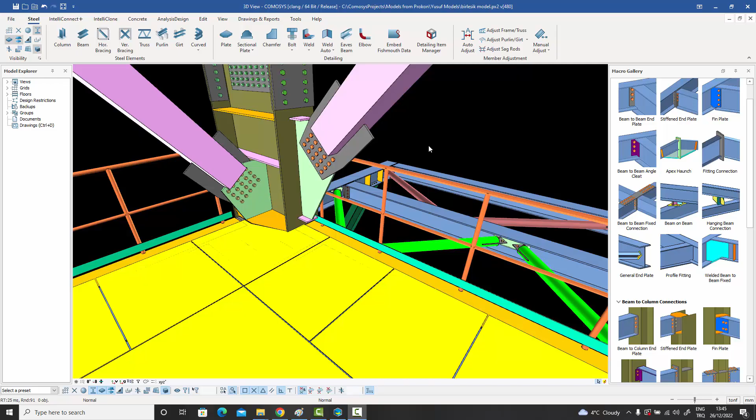Lots has happened during the last 6 months. COMOSYS has received a great response from the structural engineering and detailing community. People are beginning to see how they can increase their productivity way beyond the levels they had before. It's a cutthroat world out there, and every bit of juice we can extract out of our software is welcome. A man hour saved is a man hour earned, and when you're saving thousands of man hours, the bottom line can flip to green so easily.

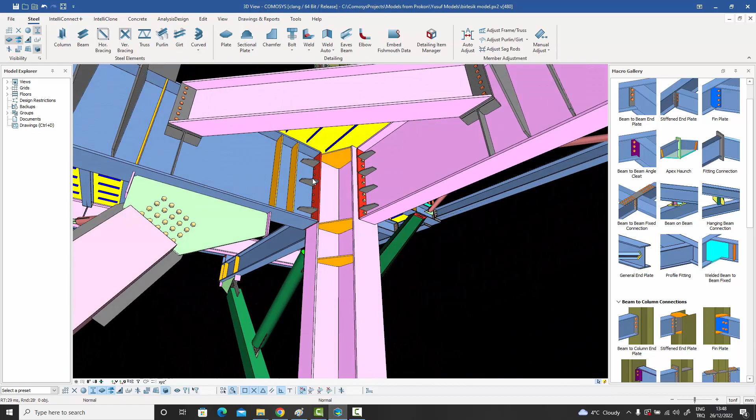Now, the next thing I want to talk about is the IFC Import feature, which we have implemented in this version of COMOSYS. IFC is fast becoming the standard mode of interoperability between programs. All the major software used in the construction industry are trying to have IFC import and export capabilities inside their software.

As you would already know, we already had the IFC export feature inside COMOSYS. So if you go to the file menu, there is import/export over here, and if you go to the export one, we already have the IFC export feature. But as of this release, we now also have the IFC import feature implemented in COMOSYS.

Before I begin talking about the details of the IFC import feature, let me start by saying that the IFC standard is a very generic format, and unfortunately many programs implement it differently. So there's not a standard way of implementation. Some implement it more intelligently than others, so in some cases you're able to extract the profile information and the material information, giving you the ability to convert these objects into native objects. But in some programs, the implementation is such that you're not able to convert it into your own native profiles. I'll talk about these things as we go along, but I just wanted to say that upfront.

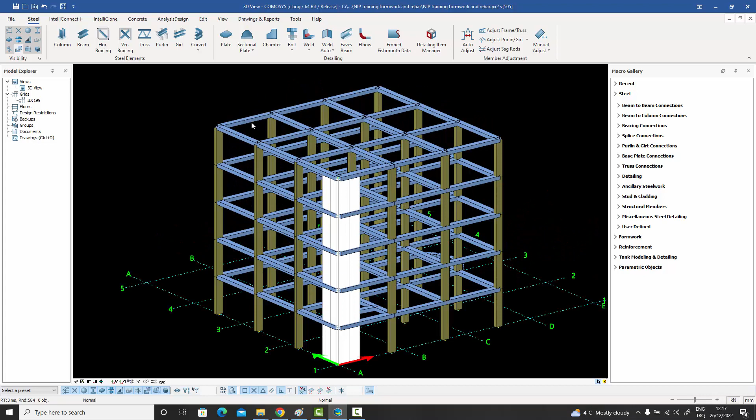If you notice, it has converted them into native objects - the beams and columns have been converted into native objects. Now let's do another example.

Let's go to the IFC import once again, and this time choose another file - the other one, TR91110. Let's say open, select that, say open, and then import. Once again, it brings up the material map.

There's one material this time, and it's undefined in the original IFC file, so I can bring it in as ST52 material when importing. Similarly, if I go to the profile map, it hasn't found any profile in this whole thing, so I can just say confirm, and it will bring in a solid.

These are all solids. None of these have been entered in the original IFC file as profiles. They've all been entered as solids. So that is the reason it doesn't know what to do with them, and it can't convert them into a native object, but it can show them to you on the screen.

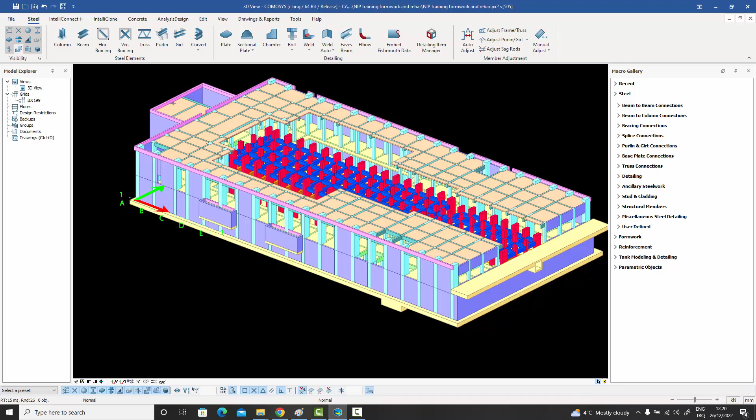So this is a very handy feature. What it allows you to do is even if the profiles are not convertible into local native profiles, it will still bring them on the screen, and you will be able to then work around them in your own.

This time around, let's choose another IFC file, and let's choose it from a different program. So let's do an ETABS example, for example. This file has been imported from the ETABS program, and let's open it. And once again, press the import button. This time it hasn't found any material definition inside the file, so that's interesting.

If I go to the profile maps, it has found these 3 profiles, and it has also found the corresponding COMOSYS names in the profile database. So we can just confirm that, and immediately the file has been imported as native objects, but their material definition has been set as default because it couldn't really find any material for them.

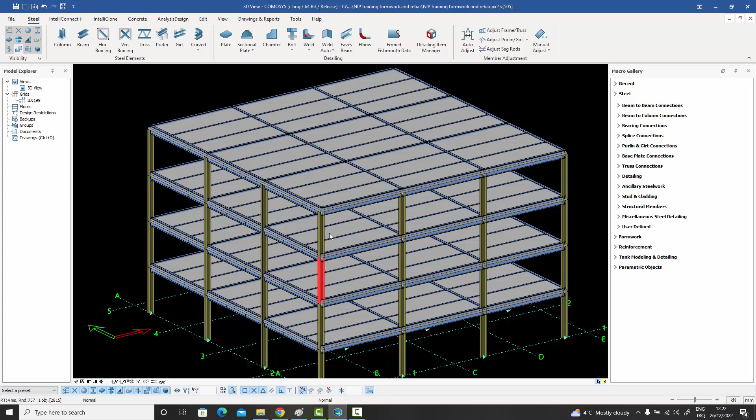So this is once again a very easy and quick way. And like I said, in this case, you can just continue your modeling directly in COMOSYS because you now have the model in the native format of COMOSYS.

Now let's do a Revit example. So let me go and select my IFC import, go to my 3 dots over here, go to the Revit file. This has been exported from Revit. We've got more than one example. Let me just take this one, for example, and import that one. And you can see that it brings you this material map.

So there are so many materials which have been defined in the Revit file, and they don't have the corresponding names in COMOSYS. If you don't select anything, then they'll be imported with standard names. But if you want, you can actually select the corresponding names. And similarly for profiles, there's no profile, it's all generic solids.

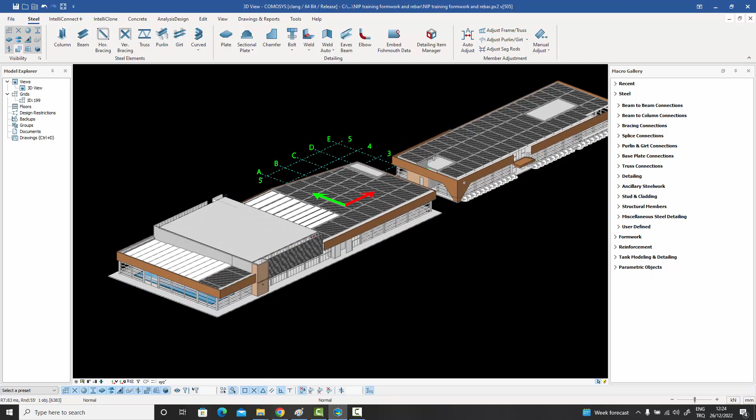So we just say confirm, and immediately we see that the building has been imported into COMOSYS, and you can see all the details. So these are all separate pieces. If you zoom into that, even the architectural leaves and trees have been imported, and you can now work around this model which has been imported from the Revit ecosystem.

So very convenient. It makes the whole process very convenient and handy. All you need to do is just go and select your IFC file, do the mapping, and you will get your model.

Finally, let's take you through the Tekla example. Let me press on these dots once again. There's a Tekla model over here. We can just double click on that and press import, and it will bring in the mapping of the materials found in the Tekla model and the equivalent materials found in COMOSYS.

And like I said, you can add those. There's also a profile map, and you can add them. If you don't select something, a standard default profile will be used. So let me just accept these settings right now. Press confirm, and you see that the model is being started.

COMOSYS has started the import of the model. This is a fairly large, complicated model, so it's going to take some time. The import will take a certain amount of time, but it will finish the job.

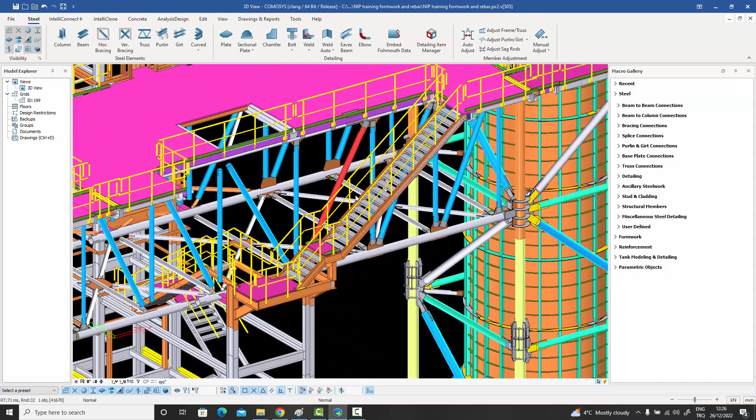And there, as you see on the screen, it has finished importing the entire structure from Tekla. It's a pretty complicated structure. It has all the plates and the profiles and the generic solids, and they have been imported as intelligent objects, or as solids, depending on whether it has found a corresponding native element in COMOSYS or not. So this is an example of an IFC import from an IFC file taken from Tekla.

I want to do one more example of actual equipment. You will require in certain cases to import equipment, for example, in the form of IFC files. So I have an example over here. It's this one, it's imported from an AutoCAD file. Let me just press that and press the import button.

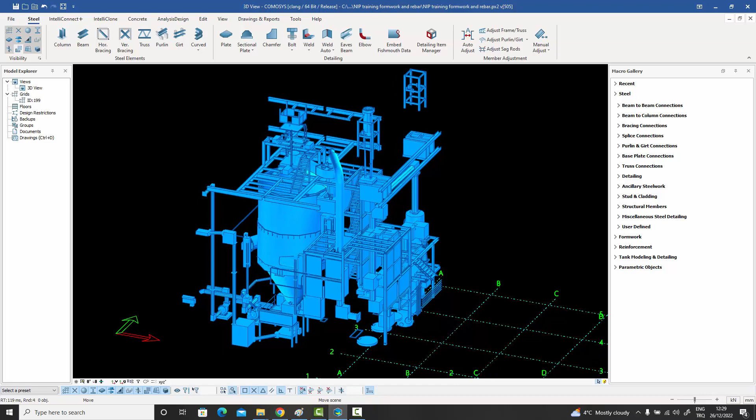It starts reading the file, and it gives us a map. Once again, as always, it takes us to this material map and the profile map. I can just say confirm. And once it's done, you can see the results on the screen. It has brought this equipment file into COMOSYS, and now you can work your way around it and create your model around it.

As I talked about, some of these objects are very complicated, and the level of detail has also been implemented. So, for example, if I were to look at this object, it's basically looking like a box.

But when I zoom in, at a certain point you start seeing the details, and if you see, it's a very detailed object with all sorts of detail inside it. And what it has done is it has allowed you to basically look at it in that way. If I zoom into that, you see the level of detail is changing. So this is a very handy and convenient way of importing equipment through the IFC format into your COMOSYS model.

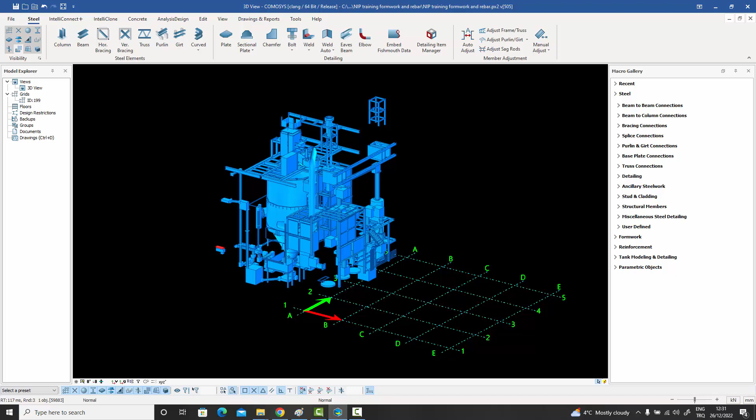Our clients really wanted the IFC import feature because they were working with other programs and they wanted to continue in COMOSYS after having done their basic work in the other software, and they wanted to continue the detailing inside COMOSYS. So with this feature now, which we have implemented in this new version of COMOSYS, we hope that you will really enjoy working with COMOSYS even more.

Another interoperability feature which I want to talk about is the new export to SAP2000 feature which we have added to COMOSYS in this version. Many of our clients are already using the SAP2000 software for analysis and design of structures. And sometimes they get models from other places, or they want to import into COMOSYS or export from COMOSYS. And the real need which they feel is they want to confirm the analysis results of COMOSYS because they're familiar with the SAP2000 interface. So there were a lot of requests in this regard.

So what we did was, if you go to the file menu and go to the import export menu, under the export menu, we previously had only the SAP2000 version 7 export, which was pretty outdated. But now we've added SAP2000 version 24. And all you need to do is just click on that, and you can select any place. You can just give it any file name which you want. And once you do that, the file will be exported to the location.

And what it does is it creates two files. One is the S2K file, but more than that, it also exports a PRO file, which is the profile section database. And the advantage this gives you is that basically the entire database as it appears in COMOSYS is exported to the SAP library as well. And what that results in is that you can actually compare the analysis results, and they will be exact to whatever fifth decimal place if you want.

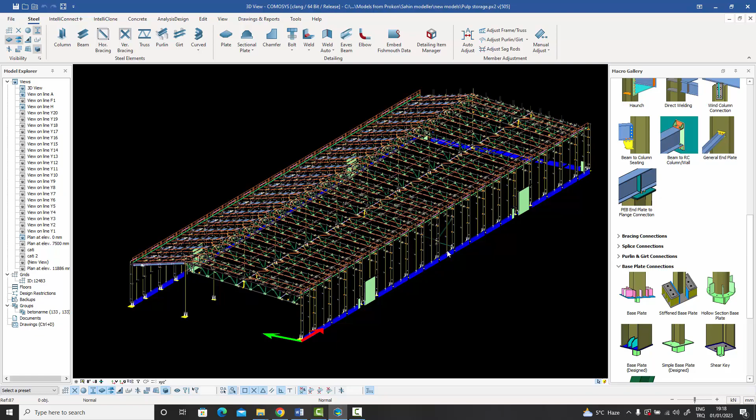Because normally the section properties in two different programs can be slightly different. The moments of inertia, for example, the radii of gyration, the cross-sectional areas, those kinds of things. And if there are minor variations, then that leads to minor differences in the analysis results as well. Because we knew that the reason why our clients were requesting this feature was because they wanted to compare the results.

So we basically exported the exact section parameters which were on the COMOSYS side, and now by a simple click, the user can just go to the SAP2000 side and import the S2K file along with the PRO file. And the only thing they need to do is that inside the S2K file, there is a reference to the PRO file, which is the section parameters, and there's a local path. This local path is dependent on your machine. So if you're giving it to someone else to use, then you need to change the path of the PRO file given in the S2K.

This is a simple find and replace command. You just look for all the instances where the PRO file has been mentioned, and then quickly find and replace with the new path, and you will be able to use it.

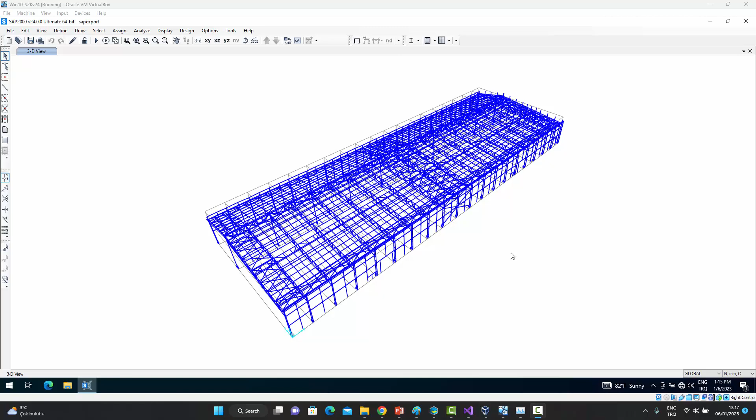Now, once you export your S2K file and your PRO, which is the section properties file, and you go into your SAP2000 application, you will see that the entire model, along with the loads and the load combinations, basically everything you need to just press the run button, has been exported into the application. And this will be a very convenient way for you to compare the analysis results and the design results if need be, and see how accurate COMOSYS' analysis engine is.

Now let's talk about some analysis and design features which we have incorporated in the new version of COMOSYS. Let me begin with seismic design options. So normally seismic design is carried out either through the equivalent static method or through a proper dynamic analysis, which requires modal analysis or time history analysis. But a lot of times the user is required to do an equivalent static analysis for multi-story buildings.

Now, in the new version of COMOSYS, if I go to the analysis and design, go to my load case, and go to create, edit load case and combinations, you must have seen this dialog box before. We've got the load case tab, the load combo, response spectrum, etc. But if I go to the load case one, I can actually create a new load case.

I can call it earthquake in the X direction, for example, and I can give it the type: it's an earthquake load. And of course other parameters might need to be entered. But what I want to show right now is this auto equivalent static load option, which you can use. We've got some options available right now, and we'll keep adding new design standards to it.

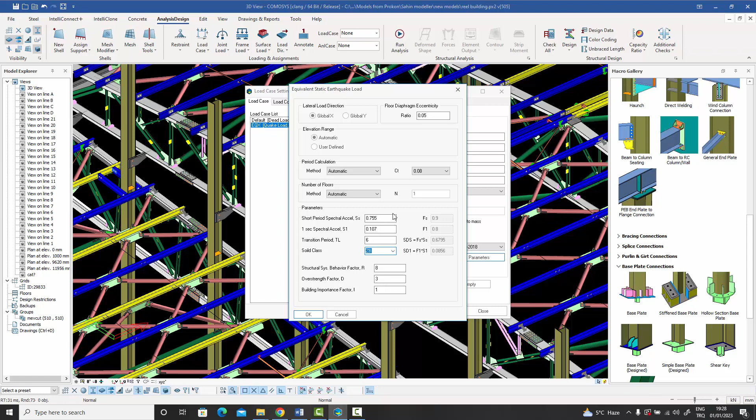So we will be adding several more of these in the coming versions. But it's going to be very easy. Once you have this set up, you just say okay, and then this load case will automatically generate its own equivalent static loads in whatever direction you've asked it to.

Now let's move on to a very important capability which we have added to the COMOSYS version of 2023, and that has to do with the supported design standards. As our existing users will know, if you go to the design settings, we had the options of the American ASD, the American LRFD, the Eurocode 3, the TS 648, and some new Turkish codes. But now we have added IS 800, which is the Indian steel code.

So you will be entering your building the way you normally do. You'll be entering your loads and your load combinations and whatever needs to be done, and then you will run the model. Once you run the model, you can select all of the elements, or you can do a one-click design. As you know, you can select all of them and check what their existing states are.

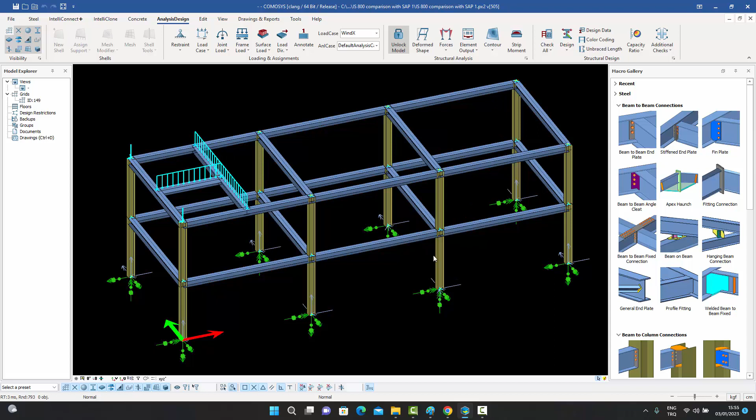So let me select this element over here and go to the check selected option. Like I said, you can select all of them, or without selecting any, just say check all. But let me just check the selected one. And when I do that, immediately it does the design check of that beam according to the Indian standard.

Now, I want to see what the results are. Over here it says design data. If I press that, it will open up this tab, which will show the summarized design data of the beam we have selected. It gives the name of the profile and the classification of the section.

Over here we have all the critical loads and which combo they occurred in. It will tell you that the location is 600 centimeters. This is the axial load. This is the M22. This is the M33. The shear loads in the second direction, the third direction, and the torsion value.

Similarly, the section properties are given over here. The other geometric properties of the section are given over here. This is where the meat of the Indian code is. So you will see the TD value, which is related to the Indian standards. This will all, of course, be given in these units, which you have at the bottom right of the screen.

The PD value, the MDY, MDZ, MNDY, all the engineers who are designing according to the Indian standards will know what I'm talking about. MNDZ, KSI, KSI LT, the alpha 1, the alpha 2 values, these are all related to the buckling coefficients. PDY, PDZ, all these values are then used into the basic axial, bending 2-2 and bending 3-3 components of the total design stress.

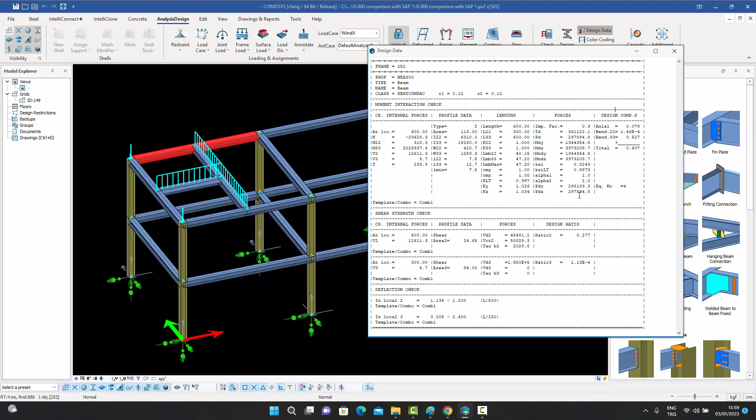Now let's talk about some macro related features which we've added to COMOSYS in this version. So the first thing I want to talk about is that we had a lot of requests from our clients that they wanted an extra option in the angle cleat macros. So if you remember, the angle cleat macros would connect a beam to a beam with an angle cleat, or a beam to a column with an angle cleat, and the cleat would be welded to the secondary and bolted to the primary. Now our clients requested that we have an extra option of having bolts on both sides.

So we have added that option in this version. So now we have the bolted to secondary side or welded to secondary side option. And if we choose the bolted one, then we can create bolts on both sides of the connection.

The next thing which I want to talk about is the flange extension with cut macro. This is quite often used in the offshore industry. And what is needed is that you want to widen the flange at a certain point along the beam or whatever element it is, because something is sitting on that. So for that, we have added this flange extension, and it's very simple to use.

All you do is you select the beam, and then you select a point on the beam, and you can do that very easily with the direct entry method, as you know. So you can say DY2000, and that will give you a point on the beam wherever you want, basically. And then you can put another one ahead of it.

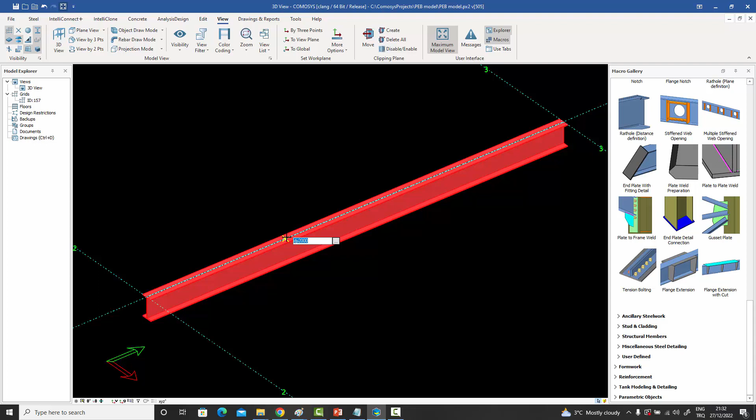And when you do that, it will create a flange extension at that point by cutting out the flange of the beam, and replacing it with a plate, one of the available thickness plates, and it will basically create this widened flange between those 2 points. And what you can do is go inside and change this distance 2000 to whatever number you actually want.

For example, I can make it shorter, I can make it longer, I can make it left aligned or right aligned. As you can see over here, I can make it left aligned like that. I can put it in the middle of the two selected points, or I can make it right aligned with the other one.

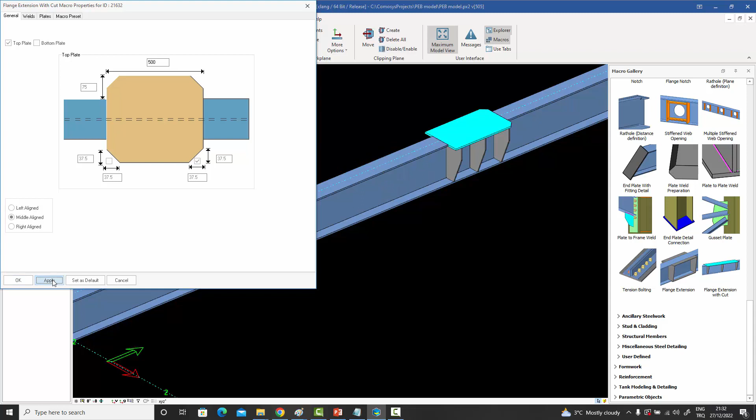Let's make it middle for the moment. And what you can do further beyond this is you can have total control over the plates, the stiffeners below. You can create as many as you want, and you can increase the width over there and all that. All these parameters are available over here. You can set your macro presets as always.

And this is a very convenient way to widen the flange. We had a similar macro before as well, which is the normal flange extension. But this one actually creates two side plates. It doesn't really cut the flange, it adds two extra plates. This new one actually cuts the flange and inserts a plate at those points and gives you a widened flange.

Now let's talk about the welded beam to beam fixed connection. This is very convenient when you have a beam to beam fixed connection. Normally with floor beams we have simple connections, but occasionally with cantilevers or things like that, we have fixed connections. And there are different ways to do that.

We can either have a bolted one, but then typically the problem is that the size of the main and the size of the secondary is not the same. So the bottom flange creates a problem, and the bottom flange pushes in or out and actually hurts the web of the main member. What is needed is something which can sort of convert the incoming secondary beam into a larger size just when it is about to hit the main beam.

And for that, we have developed the welded beam to beam fixed connection. This is also used in the offshore industry a lot. So all you do is you basically select the main beam and you select the secondary beam, and immediately you have this connection in which plates are used.

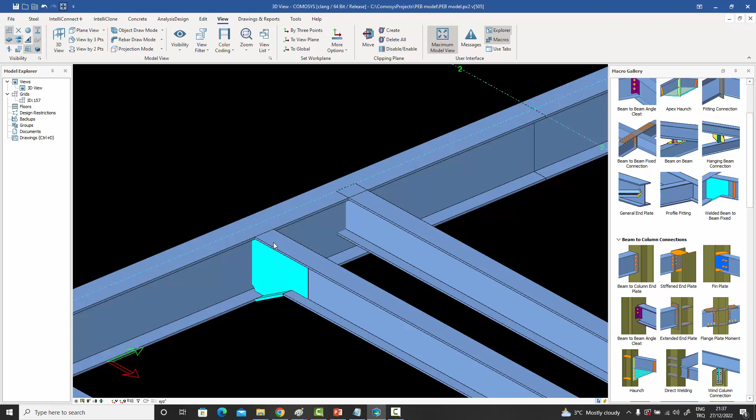The web of the secondary is cut out. So if I were to just show this one only, for example, you can see that the web has been cut out. And if I were to show all, again, a plate has been inserted in the location of the web in this way, and the flange has been extended, it has been continued in such a way that it hits the bottom flange of the main.

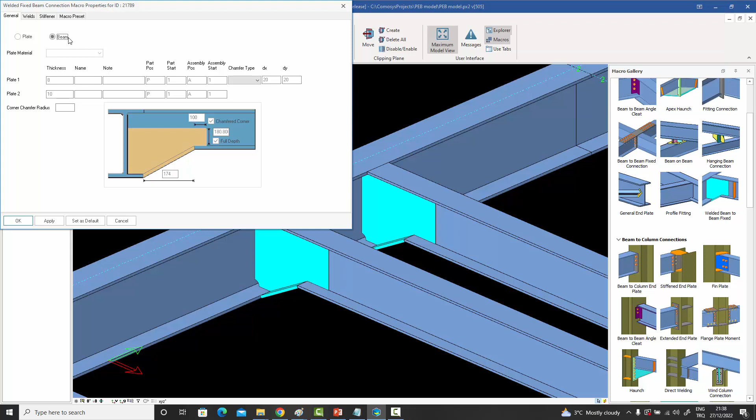Now, there is another option inside this macro. So let me connect another one over here. There's this option if you go inside the macro, in which you can ask it to use either plates or the same profile itself if possible. This one is with a caveat that it's not possible with certain sizes because of the angles involved.

But if you use the beam option, then it will use this very same profile. So this is an IPE 200. It will use a cutout piece of an IPE 200 and create that. It will widen it basically to meet the bottom flange of the main member. Once again, this is a very convenient option. You have your welds over here and over here, and now you have a fixed connection between the two beams, and there is no problem with the bottom flange pressing in.

Another connection which is very popular in the offshore industry is the welded pipe bracing connection, as you can see in the icon as well. It's very common for large pipes, CHS profiles, to be coming in to the beam. And it's also not uncommon that the bracing profiles are actually wider than the beam itself. So the flange of the beam is narrow, so for the connection, the flange needs to be widened.

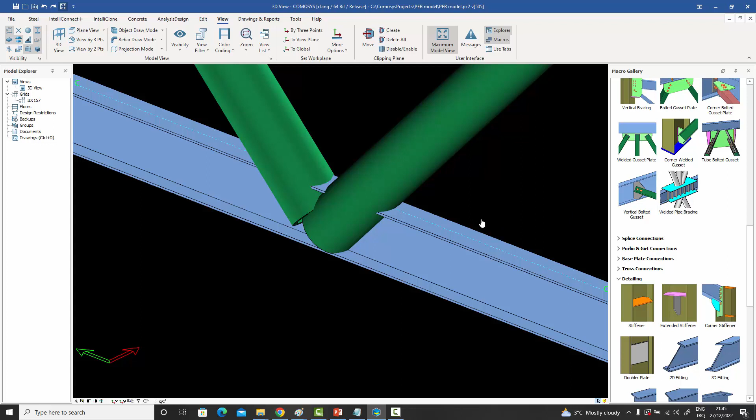And we just talked about the macro which does the widening. But here it's like a combination of this one and the normal connection. All we need is a welded connection between the two. What this particular macro does is, if I were to just select this one, for example, it asks us to select the beam and then the braces. So I can select the two and I can right click.

And when I do that, you can see that it widens the flange according to the need, and it creates a welded connection between the pipes and the plate, which has been basically used as an insert into the flange. The flange has been cut out and a plate has been inserted to widen it, and we have as many stiffeners as we want below.

The interface is complete, and we can basically have as many of those plates as we want, and we can give it whatever width might be needed in the circumstances. But the idea is that you can just directly connect your welded braces to the beam, no matter how wide they are, because it's going to widen the flange anyway.

And that's a very convenient way of creating this connection. This, like I said, is very popular in the offshore industry.

Now let's talk about some pre-engineered building macros which we have developed in this version of COMOSYS. Pre-engineered buildings are very common, used throughout the world, and there are certain connections which are repeatedly used in these types of structures. One of them is the purlin connection, in which the Z profile is used. The connection is basically explained like this: the Z profile is extended on each side, and then they're connected by bolts and a plate. Sometimes we also have struts to connect to the bottom flange of the supporting beam.

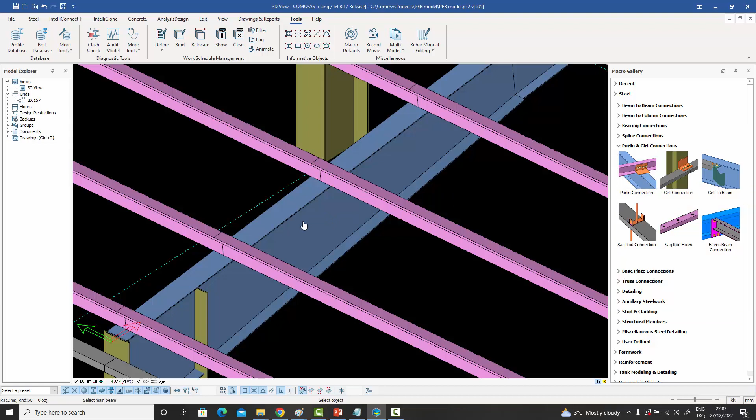Very simply, we can use the normal purlin connection, select the main beam, select the Z profiles, and we get our standard angle connection or whatever the default is. But if we go inside the macro, we have this option of the overlapped Z. If we select that, immediately an overlapped Z connection is created. What that means is that this purlin is extended to the other side, the other one is extended into the first one, and we have a plate connecting the two with 4 bolts. But then there are other bolts as well, which are just connecting the two purlins to each other at these points, according to the need.

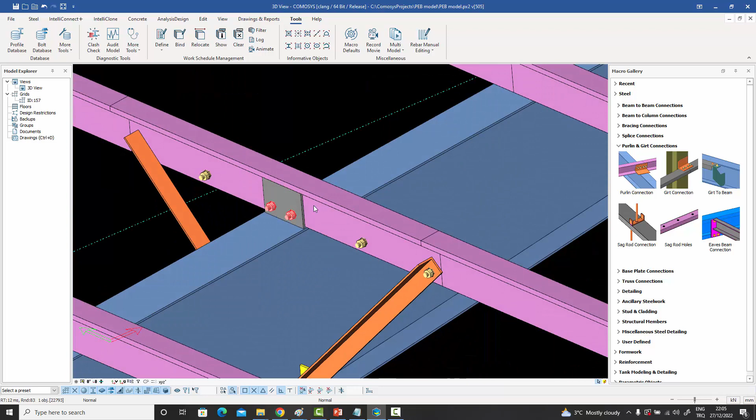What we can do with these now is, if I press the M enter button, I can go to the Z purlin tab, which is new, and I can ask for these struts to be created. These struts will automatically change the IDs of the bolts as well. If I do that, immediately those struts are created on either side of the connection. Now, since the bolt IDs are different, this is a single bolt because it's going through the strut as well, and this is a separate bolt. These two are one ID, and these 4 are one ID because they're going through the plate as well as the other one. So this is a very handy way of creating this new Z-type purlin, overlapped purlin connection, which we have now added to COMOSYS for the creation of pre-engineered buildings.

Now let's talk about another macro used in the pre-engineered buildings sector, and that is the tapered end plate splice. It's very common to have elements which are tapered, one of them tapered, the other straight, or both tapered. You need an end plate splice connection for such situations.

So what we have developed is what you can see on the screen, the tapered splice connection. All you need to do is select the first member and select the second member, and immediately your complicated end plate splice connection, with all the options of creating bolts in different locations and the stiffeners, is created for you. This is very convenient, very easy to use, and it can be used not only for columns but also in similar situations.

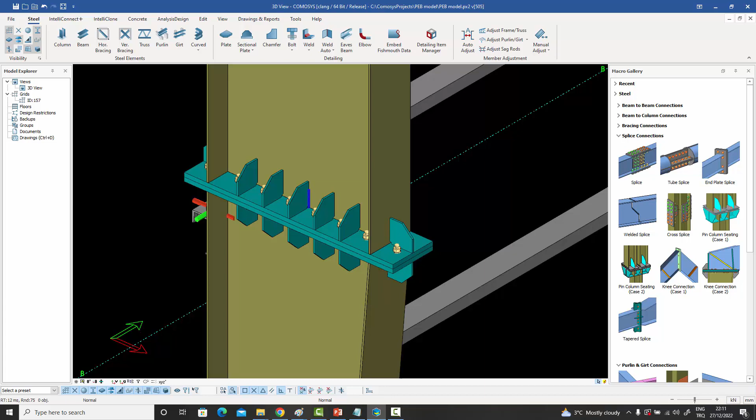Let's continue with more pre-engineered building connections. Another common situation is when wind columns on the facade go and hit the roof beam, where we have connections from the bottom side to the bottom flange of the roof beam. For that, we have developed this PEB end plate to flange connection, which is very simple to use. All you need to do is select the main beam and then select the column, and immediately this connection is created. The bottom flange is cut out, and this plate replaces it since widening is needed at times.

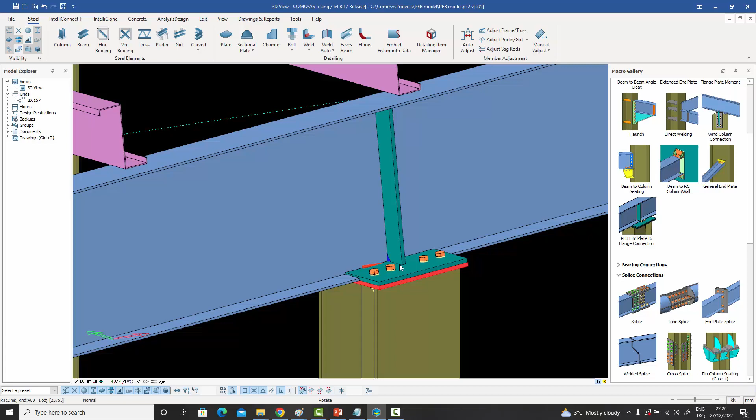Another end plate is given at the end of the column, and you can have complete control over where the bolts are and whether the stiffener will be created or not. But this is a very convenient connection, allowing you to connect the column to the bottom side of the beam when the column is facing in this strong direction.

Now, it is also possible that the strong direction of the column is along this line rather than perpendicular to the beam. This kind of situation is also possible, and the same macro works for that case as well. Once again, just select the beam and the column, and the connection is made with the same style.

You have different styles inside. I didn't open those up to show before, but you can have the option of 2-sided plates, or one plate with the bottom flange cut out, or you can have 2 plates at the sides as well. So, a very convenient way with complete control to create your PEB end plate to flange connection.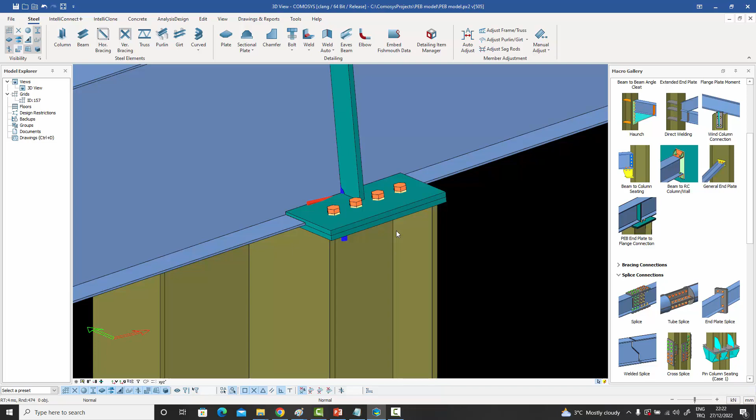Now, moving on with pre-engineered buildings, we come to this very important connection between the column and the beam, perhaps the most important connection of the structure. It is a moment connection, and it is done in different flavors and different styles. Usually we have very large panel zone shear forces in this area as well.

So we've developed the knee connection for this case, and it's very simple to use. All you need to do is select the column and then select the beam, and immediately a very well defined connection is made. Because of this panel zone, a lot of times the thickness of the web is not enough for the incoming beam, so you need a thicker plate over here. This one basically cuts out the web of the tapered member in that area.

If I say show only, you can see that the element has been cut out like that. Let me go back to showing everything. The plate has been put in there in place of the web, and it's a thicker plate than the web. You can obviously change the thicknesses according to your need.

But this one basically creates this connection, puts in the stiffeners. You have complete control over the bolts. You can even have this little extension over there, depending on where your purlins are. So this allows you to create this very complicated connection with a few clicks.

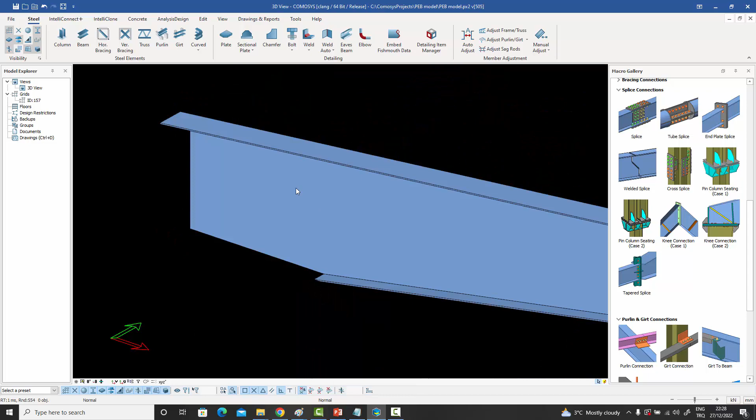In this case we have another option. We can use the column and the beam, instead of cutting the web. So if I just show this only, you can see that the web has not been cut, it continues till the end. But what we have is these extra plates which have been added - these are doubler plates, welded to the web to thicken it in that area. This convenient option allows you to reduce the panel zone stresses, and the stiffeners have been modified according to that.

But that's not all, there is another way of doing the same connection. Once again, let me choose the column and the beam, and this time what we have is the diagonal stiffener. This is another way of reducing the panel zone stresses. You basically put in a diagonal stiffener from end to end, and we have complete control over the geometry.

And the good thing is that instead of 3 different macros, all of them have been collected into this one single macro. Within that macro you have these options of creating the diagonal stiffener or doubler plates, or the removal of the web and insertion of a thicker plate to take care of those high stresses. So this is a very important macro we've added, called the knee connection, for the pre-engineered building sector.

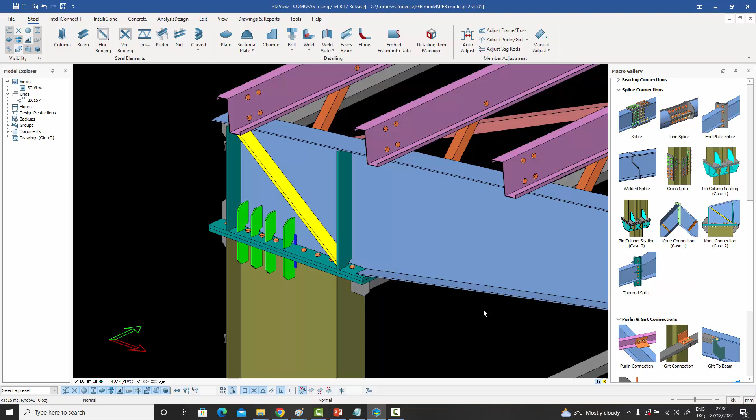And this connection is everywhere, it's rampant. With these new features, we can easily now connect our pre-engineered buildings very, very quickly with the knee connection, with the Z-purlin overlap Z-purlin connection, with the tapered splice connection, and all the things we've talked about. We can easily now very quickly go through our pre-engineered buildings.

Now, after having gone through these major improvements which really make the modeling of pre-engineered buildings very, very easy and fast, let me also talk about some minor changes we've made in existing macros. Previously, the base plate macro only worked with non-tapered sections. But now you can use the same base plate macro with a tapered column, and once again you can create the base plate very, very easily.

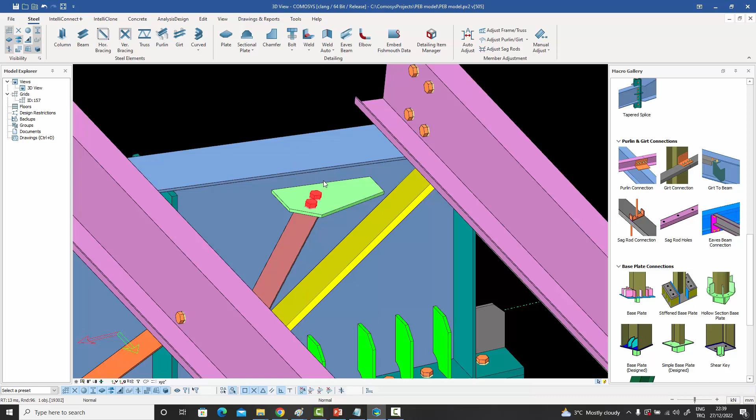Another very important improvement we have done is that now the bolted gusset and the gusset macros in general also work with the tapered profile. Here you see that the bolted gusset macro has been used to connect this roof bracing to the tapered profile. Previously this was not possible, you needed to do some things manually. Now you can easily just use the normal bolted gusset connection with the tapered elements, and your macro is done very quickly for you.

Similarly, your girt macro and the other options for the girt and purlin macros now also work for tapered members, whenever the tapered member is the main member. Previously you could not connect using these macros, but now you can with the new version of Comosys.

So that is a brief summary of the macros we've added in this new version. We've talked about a lot of macros regarding the offshore industry, the pre-engineered building sector, and general improvements. There's a lot we have done in the last 6 months, and the user will be much more satisfied with the new version. We've been listening to our clients, but this was a brief summary of only the macros which have been added to Comosys, and as you can see, these will really help you get your modeling done much, much faster.

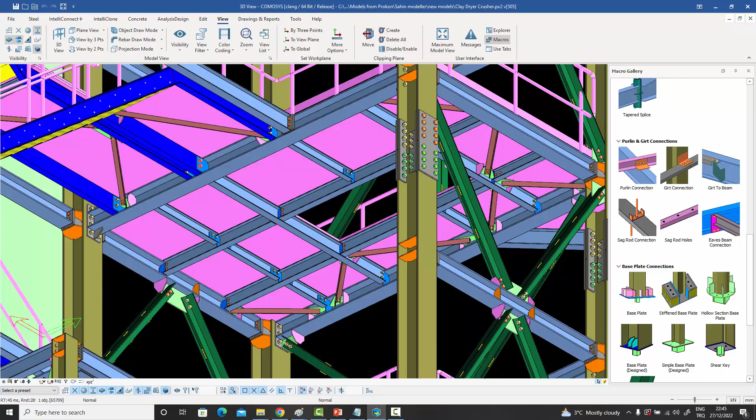The next feature I want to talk about is the implementation of Imperial Units on the drawing side of Comosys. This is a feature which was requested heavily by our clients in the US market, and also those working for the US market, because they heavily use the foot-inch system.

On the drawing side, as you know, we have the dimensions, and the dimensions previously would have the units of millimeters and/or centimeters or one of those. But now we have brought this new option. If I were to double click on any one of these dimensions, you can see that the dimension property editor has changed slightly. First of all, we now have this option of showing the unit as well. So if I press this one and say apply, you can see in which units for that particular dimension we have the units which we have turned on.

That's one extra feature the user can use now - they can have multiple dimensions in the same drawing, and some of them can be millimeters and some can be centimeters or some other unit, and they can specify there, directly on the dimension itself, what the unit is.

But what I'm talking about right now is the Imperial Units, and for this we have made modifications to these three inputs - some new, some modified. There's this unit option appearing now. When you open that, there's the option of millimeters, centimeters, meters, centimeter per meter - that's a new option. There's a foot-inch option now, which is the one we're going to talk about. There's an inch option, once again related to Imperial Units, and also a feet option. So these three are what we will be talking about.

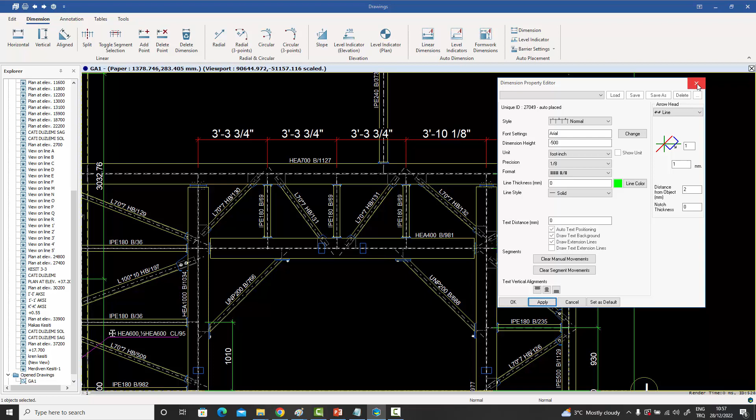You now have the option of showing the units as well. Obviously, showing the units in this case is meaningless because you're already seeing the units on the screen. But when you're working with millimeters or centimeters or other units besides feet inch, you can open up this show unit option as well. So this is a new feature. This is not only available in the general arrangement drawings, but also for your part drawings and your assembly drawings. All you need to do is change the settings of the dimensions to whatever unit style you desire, and the part drawings and the assembly drawings will be created accordingly.

The next thing which I want to talk about is regarding the improvements which we have made in the table object in Comosys. Now, as you know, the table object can be created anywhere in your drawings. And this table object is used by the automatic drawings as well, like your part drawings and your assembly drawings or any other drawing. And you can also create this table object manually if you wanted to.

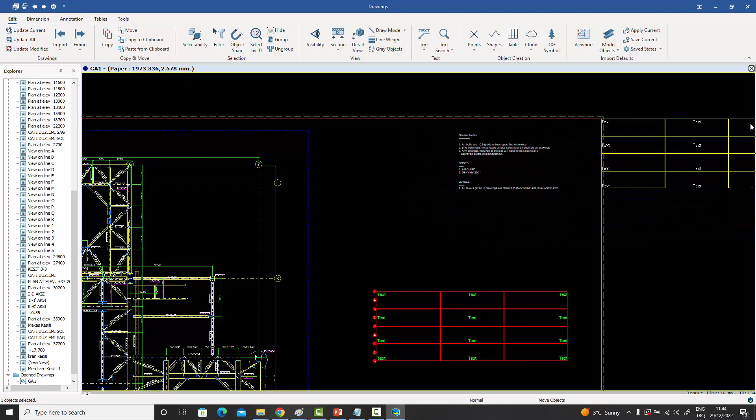Now, the first very useful thing which we've added to these tables is that now if you move them around, they snap to corners of objects. So if you notice, if I bring it close to this view, it snaps to that view. If you bring it close to the top right corner, it will just snap to the top right corner. If you bring it from the outside, it will snap from the outside. Similarly, if I were to take it down, let's make it go over here.

If I were to zoom into the top right corner, or the bottom left corner or the top left corner, you can see that it is snapping to these. Similarly, if I take it over here, I can make it snap to this view over here. So this ability to snap to any of the four corners of the nearby objects has been added, and this really helps the user in aligning tables to other tables, to whatever paper size you're using, or to even viewports.

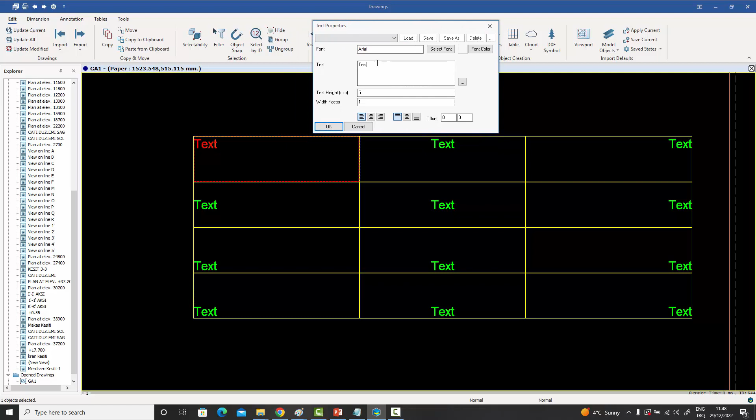The next feature which we have added to the table is the ability to now enter multi-line text inside a cell. So previously, inside the cell, we could just have one line of text. But now if we double click on any one of these texts, the text dialog box appears. And if we want, we can write a multi-line text over there, pressing enter. And when we press OK, that multi-line text appears in that cell. Previously this was not possible.

Now let's talk about text rotation inside the cells. So for that, if I double click on this table and I go to the second tab, cells tab, I can see that it has 4 rows. And if I select, for example, the second row, I can see the contents in the columns. These are the 3 columns, and they all have text inside them, as you can see on the screen as well.

So I can select any one of these columns, and let's say I select the first one. Now if I select this text rotation option, give it a 90-degree rotation and say apply, then the text is changed. The text is now given a 90-degree rotation and becomes a vertical text. If I want, I can change the location. I can put it on the left side or on the right side.

And if I want, I can even give it an offset using this parameter. And this offset is then applied to the alignment. So as you can see, the alignment can be set from left, middle, right, and from top, middle, bottom as well. And furthermore, offsets can be given to it. And these are features which weren't available before.

Now, another thing which we can do is, for example, if I were to double click on this text and write a long sentence, let's say I write the quick brown fox jumped over the lazy dog and enter that. Now, as you can see, the length of this sentence is enough to cross over into the other cell, and I don't want that. I want it to wrap within the same cell.

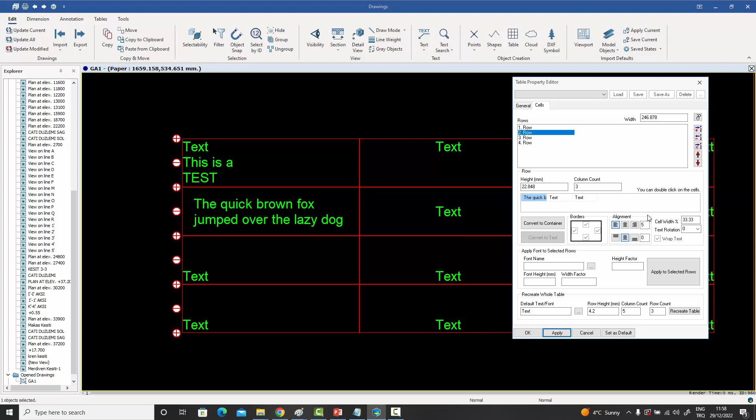So what I can do in that case is select the table, go to the second row, select this text from here, and say wrap text. Then that text is wrapped inside that particular cell, as you can see on the screen. If I come back to this text rotation feature and convert this long wrapped text into a vertical text, for example by choosing the 90-degree option, you can see that I can even do that, and it now wraps in the other direction.

So this is very useful, and you can create lots of different combinations and styles for some very specialized tables which you might have. Now, of course, you have complete control over the height of each row and each column. So if I see that this is not fitting perfectly, I can just select the second row and give it a different height, and the height will be adjusted according to whatever I want.

One very handy feature which wasn't available before is the ability to merge cells. So if I wanted to merge this cell and this cell, all I need to do is select the text of the first one, press Control, select the second one, right-click, and say merge the selected cells. When I do that, immediately the middle border is removed and the whole thing becomes one cell. And the texts of both the cells are maintained in their respective orientations.

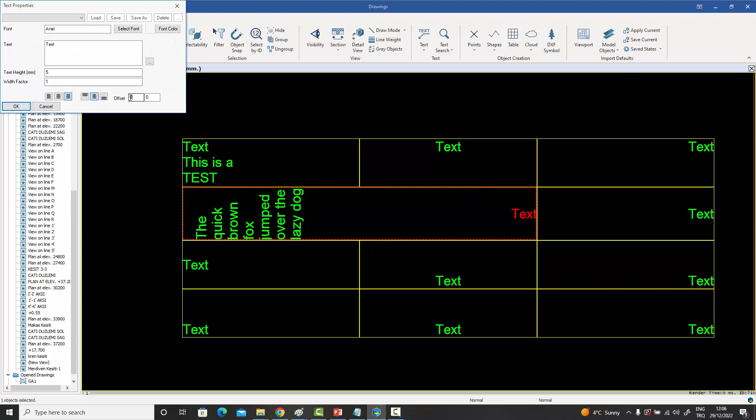So if I wanted to double click on this text, I can take it to the side, for example, and even give it an offset of 12, or whatever number I want. So now I have this merged cell in which I have control over the texts which were inside the original cells as well. So this ability to merge cells is very handy.

And if I'm not happy with that, I can just select the cell, right click and say explode the selected cells. When I do that, the two cells are brought back to their original positions. This merging, incidentally, can also be done vertically. So if I select this text and say merge cells, then those two are merged together now.

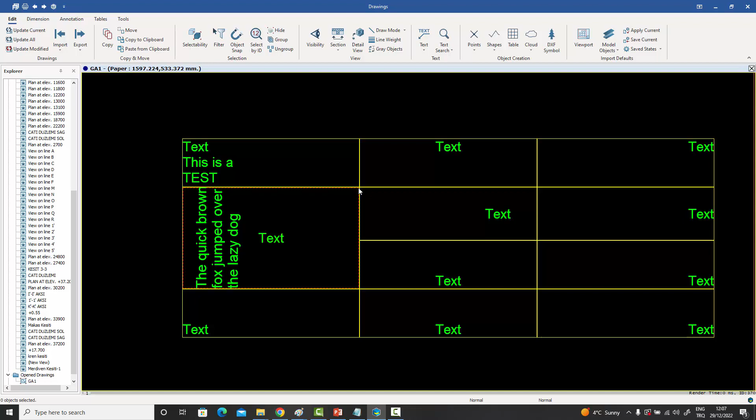But now obviously the individual text, so if this one is a vertical text, the other one is like that, I can take that in there and say I want to take it to the right, or I can take it to the middle, and that's probably enough in this case. So I can do stuff like this. I can merge vertical cells as well. So this is a very handy feature which allows you to build very complicated tables if need be.

Another feature which we have is now if you select the table itself, you see that these handles appear on the left-hand side. And they're there to add new rows or to delete existing ones. So if I just press this plus button over here, another row is added. If I press this one, another one is added. If I press another, one is added. And it's as simple as that.

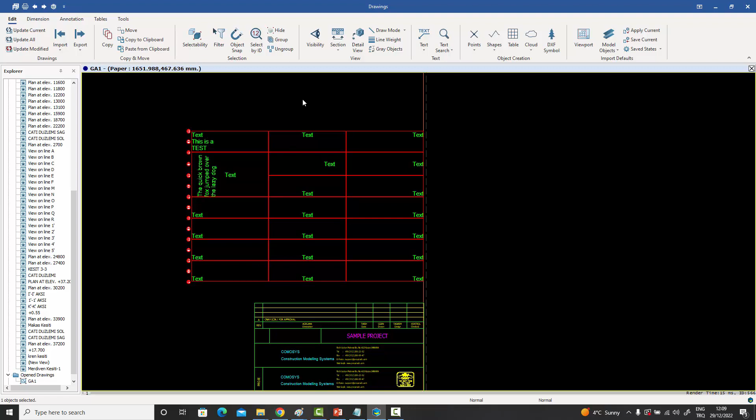You can then, of course, like I said, move it around and make it snap to whatever position that you want. But this really makes the addition and subtraction easy. If I wanted to remove this last one, for example, I'll just need to remove it like that. So this is a very handy feature as well, which has been now added to the standard table object which we have in Comosys.

Now let's talk about another feature, which is the ability to create containers within these cells. So let me just create a container first. Let me, for example, create a little circle over here. You can use these objects which we have in Comosys to create all kinds of shapes and sizes. So let me just zoom in. I want to create a horizontal line. And then I want to create, for example, another rectangle somewhere over here, like that. And this is a shape which I want. I can make it more complicated, of course, but this much is enough to explain the feature.

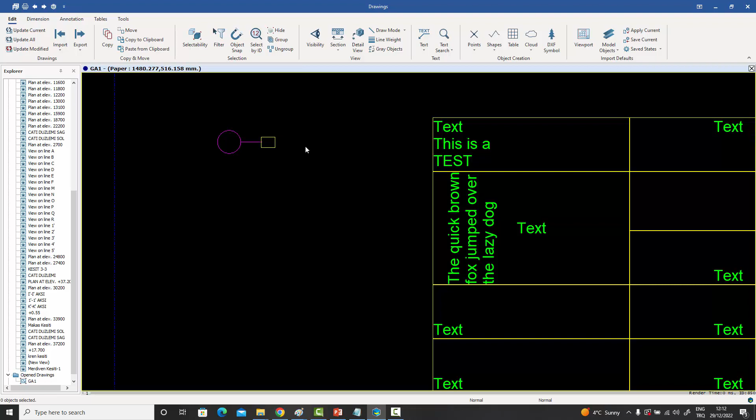What I need to do is convert this whole thing into a group. So I have this group option over here. And when I press that, I can give that thing a name. Let's call it G1. And now this whole thing is G1. And the G1 can be moved around. It has nothing to do with the table at the moment. It's a separate drawing I have made on the side.

But if I double click on the table, go to the cells and go to my first row, for example, and the second text, which is this one, and if I say convert to container, this container list comes up and the G1 which I just created is given to me. And when I do that, it is converted into a container. And now the container fills that cell. So this is another handy feature which allows us to put different shapes and symbols which we have created inside Comosys inside any cell which we want.

After having put this container inside this cell, what I can also do, of course, is give it some orientation. So I can put the middle orientation like that, and it's put in the middle. I can take it to the left if I want, like that. I can give it further offset; basically it behaves just like a text. So I can create any shape. This shape can include other things as well, and the whole group will be put inside this text. So this will allow you to put things like logos or some shapes which you want in your table.

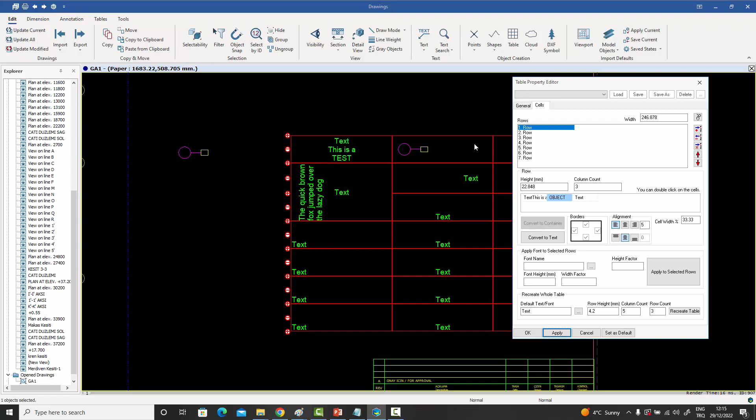Sometimes we have very specific requirements. We want to show a steel profile, the cross section of a profile, and this kind of thing is usually difficult to do in tables. But with this feature, you can create these containers, groups, and then put them inside your tables very easily.

Now let me talk about some database improvements which we have made in this new version of Comosys. As you know, we are expanding globally and new markets are being reached. So we are constantly adding new profiles and new bolt databases, profile databases to our existing database. If I were to double click on this beam, for example, and press this button over here, which is used to open the profiles database, you can see that this area has been renewed in general.

And what you're seeing on the screen is that we've added the Russian profile set. The I profiles, all the I profiles are there. In addition to the I profiles, the pipe profiles are there as well. The angles, the channels, all of them have been added to the database.

And with this capability now, our clients using the Russian interface will be able to add the Russian profiles directly from within Comosys. They won't need to add the profiles separately, but we'll be providing these profiles off the shelf. Now, as you can also see, with each profile, the GOST standard related description has also been added. So this is very convenient, and this information can later be used directly in the templates which we have also provided.

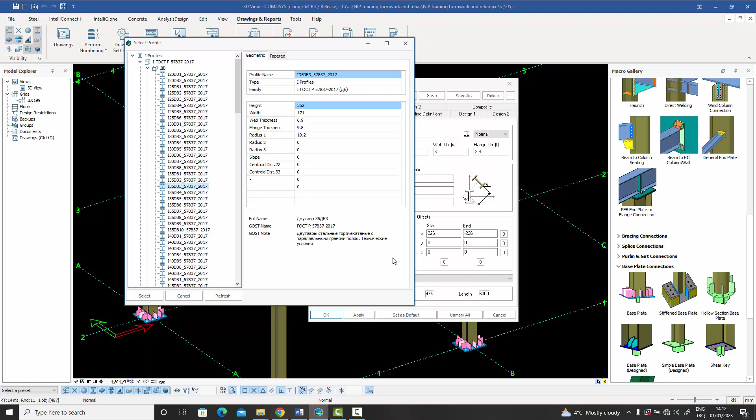Now let's continue with the improvements we've made regarding the Russian market. And I want to talk a little about the templates which we have provided, automatic off-the-shelf templates. So here you can see on the screen, there's a little structure which I've created. It's just simple 4 columns, 4 beams, some floor beams, some connections and some base plates, etc. It can be much more complex, as you know.

But once you have created your structure, and you have done your numbering, and you've done your drawing settings for the assembly drawings and the part drawings and the layout settings, etc., which are provided off the shelf. They're very simple to do, and they've been explained in some other videos. All you need to do is just select any part, right click it, say create drawing, and say create assembly drawing. Or similarly, you could go to any part, right click, and say create a part drawing. Or like we already know, we could just select the whole building, right click, and say create the part or assembly drawings, depending on our settings.

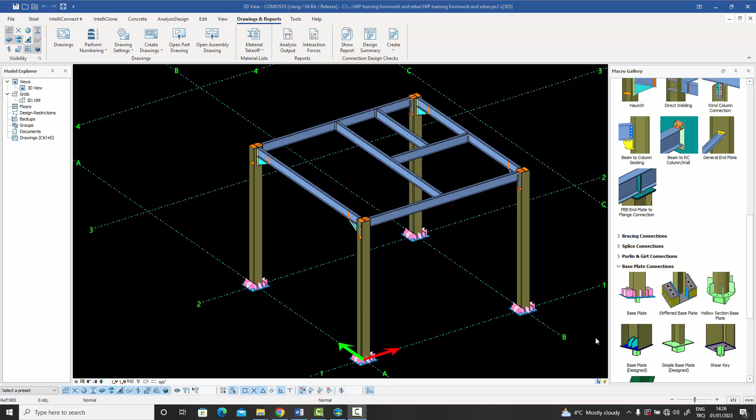And it is exactly in accordance with the GOST standards, and all the title blocks and all the titles have been given, the headings have been given. The format is exactly in accordance with the requirements. If I were to go down, then we also see the title block over here, and this one is also provided exactly in accordance with the Russian standards. And we have the capabilities, I'm not going to show them over here, of including signatures as well as all the customized information which we have in the title block. So this is very convenient.

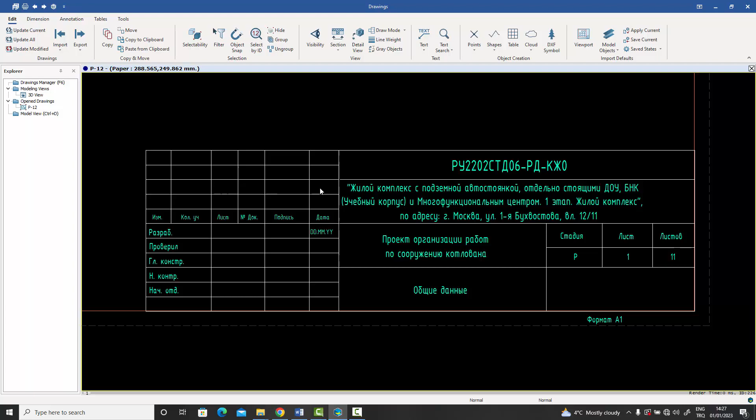All you need to do is just create your model, and once you've created your model, you do the numbering, and you just right click on any part, and the part drawing will be created, as you've seen, directly off the shelf without any customization being needed. Now let's move on to the assembly drawing of the column which I talked about. Let me double click on that drawing and open it. And as you can see, once again, the drawing is pretty neat and clean. The column was slightly complicated, but we have all the single parts and everything over here. But more importantly, once again, we have the off-the-shelf tables, the assembly tables directly without any customization being needed.

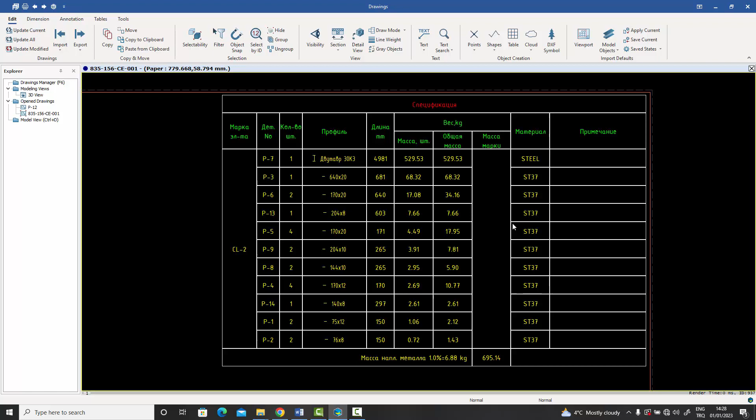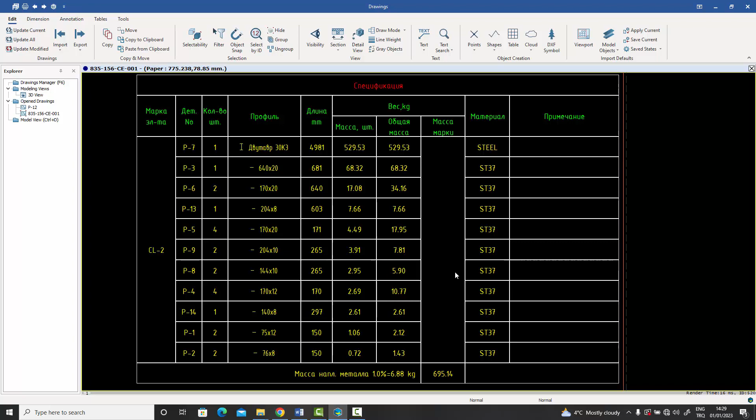All you need to do is just create your model and create the drawings. And as you can see on the screen, this is exactly in accordance with the requirement of the market, with the requirement of the standards. The assembly drawing has been given, the individual pieces have been given, the material summary has been given as well. So this is exactly what we want. We don't want to waste a lot of time customizing these blocks, which are pretty complicated and require a lot of effort. But we have made that effort, and we have created these off-the-shelf tables for you.

And it's not just the part drawings and the assembly drawings for which we have created the tables for you. Let me go back to the drawing manager and open a general arrangement drawing over here. Over here it's just an empty drawing. I haven't added anything on it. You can see the whole structure over here, or you could filter it if you wanted to. You could see part of the structure.

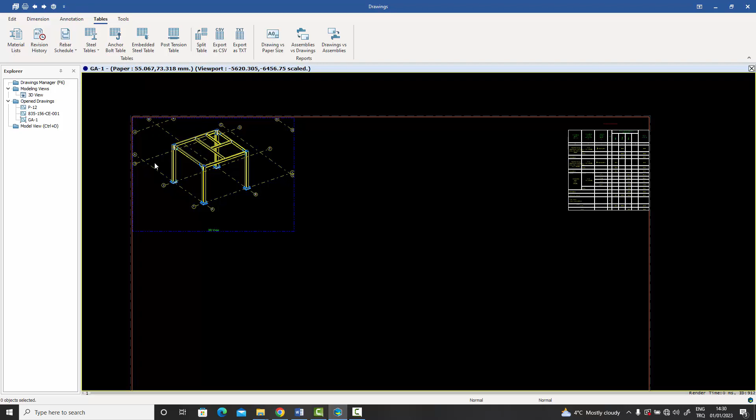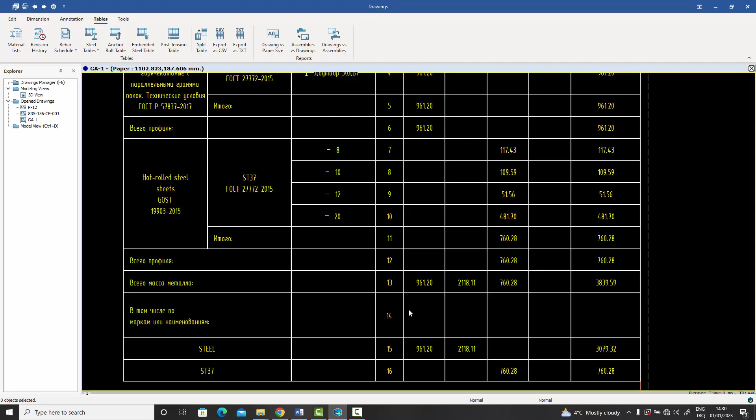And if I were to zoom in over there, you can see that it has created this very nice table exactly according to the size specifications, the height of the rows, the width of the columns, the titles, all the contents have been taken from the model. As you can see, it's very neat, very clean. No customization is required from the user. It comes directly off the shelf. When you buy Comosys, you get these tables with it.

So this is very handy and very useful. It saves a lot of customization time, because normally when users buy such advanced software, they spend months sometimes trying to get these tables ready for the market. But we are providing them off the shelf and you can use them directly. The last thing which I want to talk about now is the drawing list template, which we have also provided in this version of Comosys off the shelf.

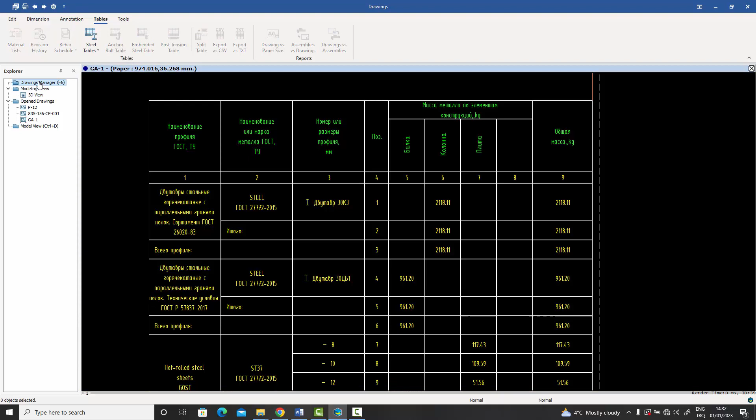And as you know, in the drawings manager, you can have hundreds of drawings. You can have lots of part drawings, assembly drawings. You can filter those drawings in this table. You can create a list of only the GA drawings, for example. You can create a drawing list of only the assembly drawings or the part drawings, or basically any selection of drawings which you do.

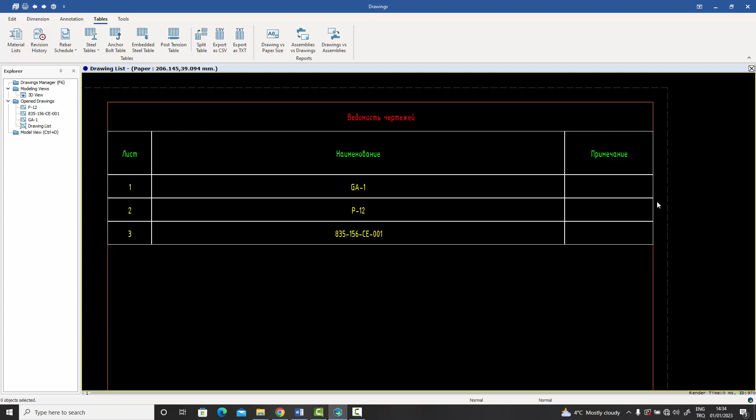Once you do that, using that filter, you can create an empty drawing called the drawing list, and you can go inside that, and you can actually create this drawing table, the table of the drawing list, inside that empty drawing, and it can be exactly according to the filter which you have. Whatever names you have given to the drawings, they will appear over here. There'll be a serial number, and you can have your own remarks or notes as well if you want to. So very handy, very useful features. Once again, we hope that the market will be able to use Comosys as it is directly off the shelf, and that's, in our opinion, very important.

And now I come to a major announcement. This is something which our clients have been asking for a long time. No matter how many commands we have, no matter how many components we include in Comosys, the fact remains that in every country, in every company, things are done slightly differently. Everyone wants their unique flavor of detailing to be included, but this is not always possible since it creates unnecessary clutter for the others. Similarly, many times we have special needs based on a particular project. What is the solution?

Yes, you guessed it, an API which allows our advanced users to develop their own custom components and commands. This ability, which we are introducing with this release of Comosys, will free you from any shackles. Comosys already provides our users with amazing features which get things done in hours where others take days. But now, with our new .NET-based API, you will be able to do in minutes or even seconds what Comosys does in hours.

I want to invite all those out there who are already developing custom components for other softwares to use our API and give us their feedback. This is a beta version, which means that we will be refining it even further to include many commands which will make our API better than that of our competitors. The good thing is that you don't need to be an advanced programmer to use our API. Any language of the .NET platform can be used to develop your own components now. It is as simple as 1, 2, 3.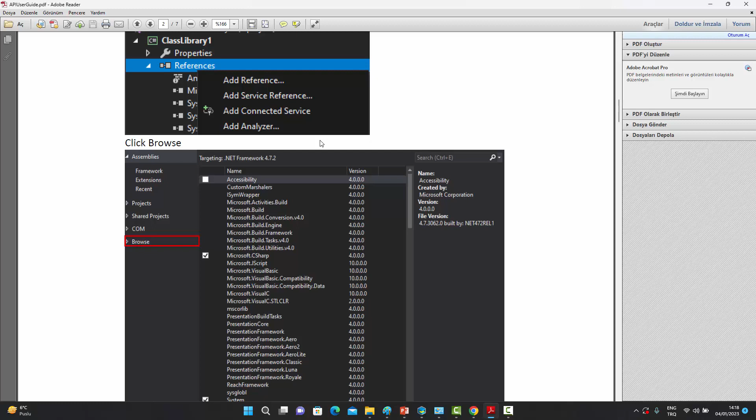What we will be providing you is a quick start guide, which will take you through the steps of creating your own project inside the .NET framework using the API DLL we provide our users. You can go through this document, and it will take you step by step to create your own project, and then use the templates we've provided to create your own tools, macros, components or commands, which you program by filling in those blank templates. Once you're done, you'll find the whole system extremely easy to use, and a good programmer with some experience in similar API development will probably be up and running in a couple of days.

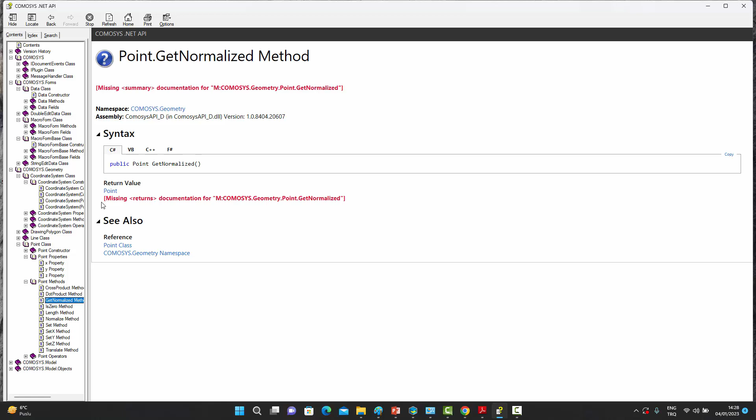In addition to the quick start guide, which helps you set up your initial DLL project, we also provide the Comosys.NET API documentation, where you have all the class structure for the Comosys geometry, the forms, the geometric classes, whatever we have built in right now, and the functions available. They are given in this file, and you can browse through the available functions. And if something is not available, you can develop that on your own as well.

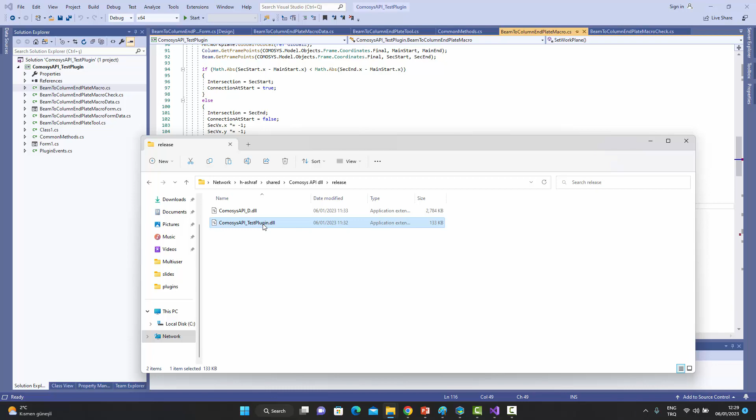So how easy is it? It's extremely easy. Once you're done with your coding, all you need to do is compile it, and the .NET project will be compiled in the form of a DLL. At the end of your project you will get a DLL, which obviously can have a different name - it will have the name you give it. All you need to do is take this DLL from your project and copy it to the Comosys directory. Inside the Comosys directory there's a plugins directory, and all you do is copy your DLL inside that directory. That's all you need to do.

Once you're done with that, you can open your Comosys application, and on the right-hand side, besides the normal components we provide, you will also get a new user API components tab at the end. Inside this component, lo and behold, will be the macro you have created. You can create your own icons, and even sub-levels below this user API components - steel macros, concrete macros, whatever it is you want.

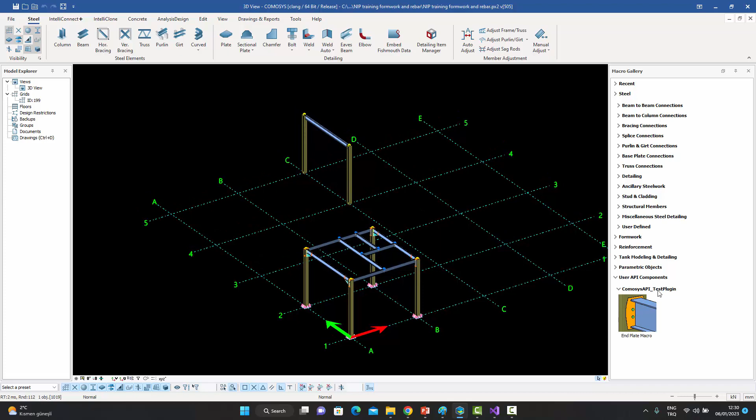Here I'm just going to show you this one single example. All you need to do is, it works just like a macro - you click on the button. This is a very simple end plate connection between a column and a beam. You select the column, you select the beam, and the macro is created. Once again, it has all the features - you can press M and the macro button will be selected. It works just like a local Comosys macro, which you have already seen.

What we are foreseeing right now is that many of our clients have the capabilities of developing their own components, their own tools, their own macros. And we are seeing that in the coming months and years, the Comosys ecosystem will grow tremendously because of this new API, exposed API feature, which we are providing with this version.

And now for the final feature. The final feature I want to talk about is actually more than just a feature, it's a capability, which in my opinion separates the men from the boys, if you will. Very few programs, in fact only one comes to mind readily, has this capability, because most software out there doesn't really deal with very large models. But as you've seen, Comosys does so very easily. So perhaps you've guessed what I'm talking about.

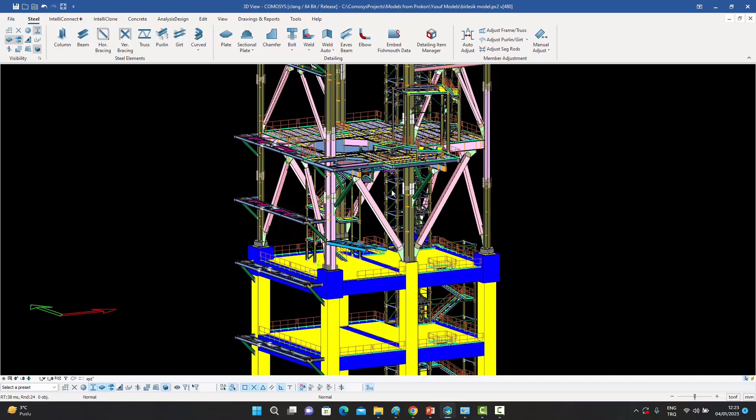It is the new multi-user capability, which we are now branding as our Cloud Fusion technology. This is the first beta release, and we will be making it even more powerful in the coming months and years. Currently, it works on the LAN, the local area network, although any user can connect via the internet from a remote location as well. The basic idea is to allow many users to work simultaneously on the same model. So let's start by taking you through the installation steps, because those are very important from the administration point of view. And then towards the end, we will talk about how we actually use this fascinating technology.

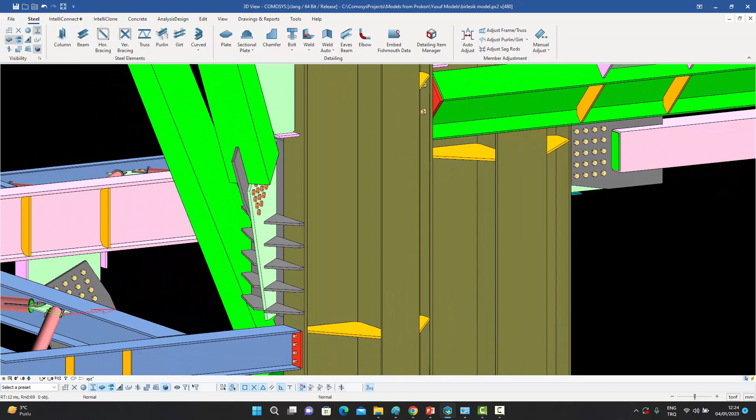Now let's talk about the Comosys multi-user installation, the server installation. Besides your normal Comosys setup file, which you will have when you're setting up the system, you will also have this Comosys multi-user server installer executable. When you have this on your desktop or wherever you want to keep it, you can double click it to start the installation. So let me do that.

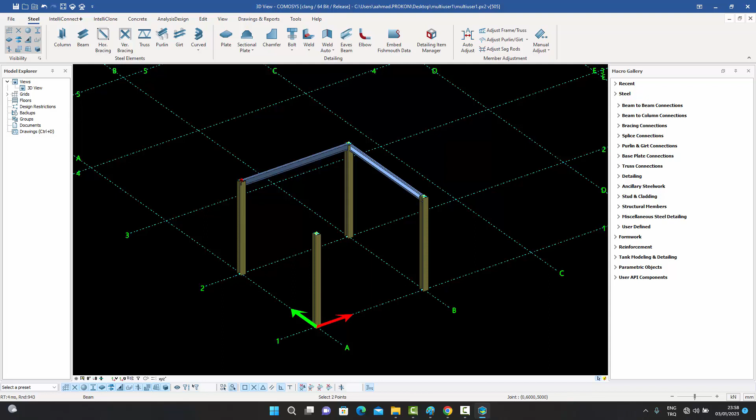Now what I can do is, remember this is user 2, I can add a few beams over here. Okay, this is my contribution to the model now. And when I do that, I can save my model.

When I do that, notice it says load updates from server and save changes to the server. I can use my own save. This is on my local machine, but I still haven't saved it to the server. So if I say save changes to the server and press this button, it asks me for a tag because it needs to first check on the server.

So let's give it any tag we want. Let's call it D1 description. Notice it's not asking me for the read-write levels because I'm not the owner of this project. Let me just say save.

Now when I do that, it has put this model on the server. So my contribution, the 4 beams, are now on the server as well. They're the same on my local machine because I've saved them, and they're the same on the server too. Now I'm going to shut down this Comosys instance.

Do you want to save the project? I've already saved it, so no need to do that again. And I'll open the same application again, but this time as user 1. So let me open the application once more.

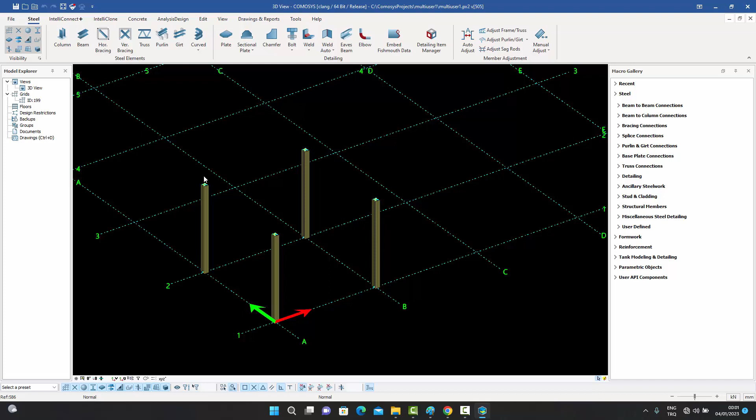Now imagine that I'm on the user 1 machine. This is where it was on my local directory, let me open that. When I do that, I don't see the 4 beams because this is the way I had left it. But the other user, user 2, has gone in and entered 4 new beams. But this is the way I'm seeing it on my machine.

Now if I go over there, it shows that I need to load the updates from the server. So this one is on and this one has been turned off. So what I do is immediately press this load the updates from the server. Something has happened, it's not allowing me to put my stuff on the server, so let me just press this button.

And when I do that, immediately whatever changes were on the server have now been added to my machine as well. When I see them and I'm okay with them, I can just press save, and now they've been saved to my local machine as well.

So this is very convenient. I've just walked you through 2 users and the admin setup of the server database and everything. I've taken a while, probably 15-20 minutes on this. The reason I did so was because I wanted to actually walk you through it. It's not limited to 2 users - you can have 3, 4, 5, 10 users, however many you need.

Normally, you will not need 10 users or more than that. Typically, in most large scale projects, you're working with 3, 4, 5 users at the same time. But this is the way you will set up the system.

First of all, to start off, you will need to set up the multi-user server. The admin will create the database, create the users, and send the registration file to the users. The users will then go to the multi-users tab, create their own passwords and log themselves in.

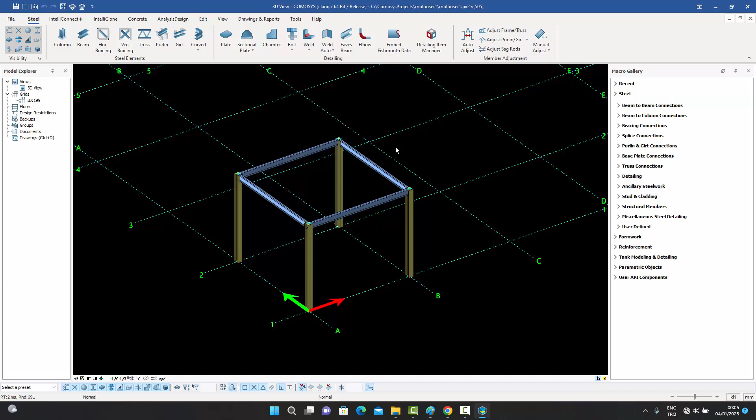So here, for instance, I added the 4 connections in the user 1 model and uploaded my 4 connections, the haunch connections you're seeing on the screen, to the server. And now I've opened the user 2 model. I just downloaded from the server, and I have managed to download the 4 connections, as you can see on the screen.

Now let me make some changes on the user 2 side. For example, I can go to my edit menu and break this frame somewhere over here, and create a splice connection between this beam and this beam. This is the modification which user 2 has now made. I can save this model on the user 2 side, and then save these changes to the server once again.

So let me press this button, and once again I need a tag and a description. I can basically enter any description. The purpose of this is to have some sort of tag associated with that change so that we can review it later.

Now that I'm happy with this model and I've uploaded it to the server, I'm going to shut down the user 2 Comosys and open the user 1 Comosys this time. The user 1 Comosys just has the 4 haunches connected, if you remember. So let's see. Yes, this is user 1.

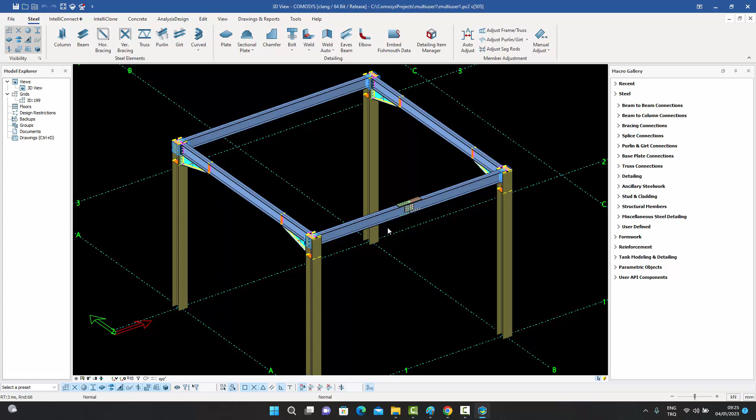So I just press this button, and immediately whatever was on the server now appears on my screen. So I know what the other person has done. He's broken the beam into two, created a splice macro, and this really makes things very, very convenient for me.

To continue, now I'm on the user one side, and here I have made some extra connections by using the existing plates which already existed from the haunch macro. I've made this connection, the stiffened end plate connection. And what I can do now is save my model. When I save it, I'm saving it on my local machine, and then I can put it on the server.

So I've made this connection over here from this side, and I similarly made the other connection for this beam as well. After having made these two extra connections on the user one side, I can now decide to put them on the server. Once again, a tag is needed, a description is needed, and I can just say save. And now it has been saved. I can save my local model again if I want to. I can shut down Comosys. I don't need to save it now because I've already saved it.

I can now go back to user 2, because I was in user 1, if you remember. User 2 is the model which is residing on the desktop. Like I said, I'm working on the local host. So this model is now being opened by Comosys. And as you can see, those connections don't exist right now because they haven't been pulled from the server, but this button has lit up.

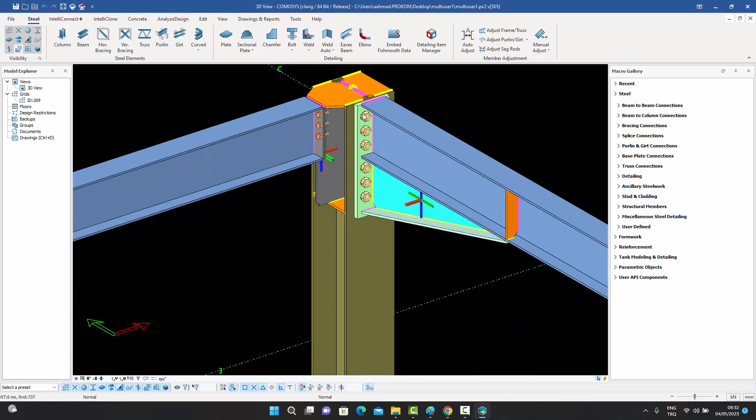And if I press this button, let me turn off the cuts so that you can see them, the connections which the other user had made now appear on this model as well. So a very, very nice feature to have, this multi-user feature. It really allows us to work with large groups and large projects.

I'm doing a very simple case, but the reality is you can extend these ideas beyond the level I'm showing right now. Typically, let's say 5 users will be working on 5 different stories, like I said. And ideally, something you do in 50 days, you'll be able to do in 10 days. So a very useful feature to have, and we really hope that our users will enjoy using this, especially those working with large projects.

One thing I would like to mention at the end is that this server will be lying on the local area network of the company. So all the users inside the company will be able to see that server machine on the network. This is the name of the server machine, and they'll be able to see it directly. And this is the path of the multi-user data on that server.

But if somebody from another company wants to join, they can, for example, connect through a VPN server. As long as they're connected to the same server name, they don't necessarily have to be physically present in that building. They can even be in another country, and they can work together with the other users on Comosys.

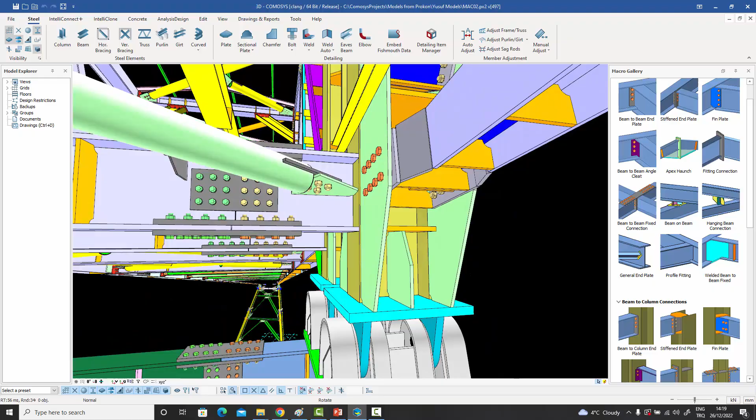In the end, I want to emphasize that Comosys was already a formidable software for the structural design community. Even without the features introduced today, it was extremely powerful and had a proven track record of saving thousands upon thousands of man-hours for its users. But today it got even more powerful. Version 2023 will take your business and give it some wings. It will allow you to leave your competitors behind.

Once your people are trained, there is no looking back. I can promise you that. All I need from you is commitment. All I need from you is the vision to take this necessary step of choosing Comosys. It will not disappoint you.